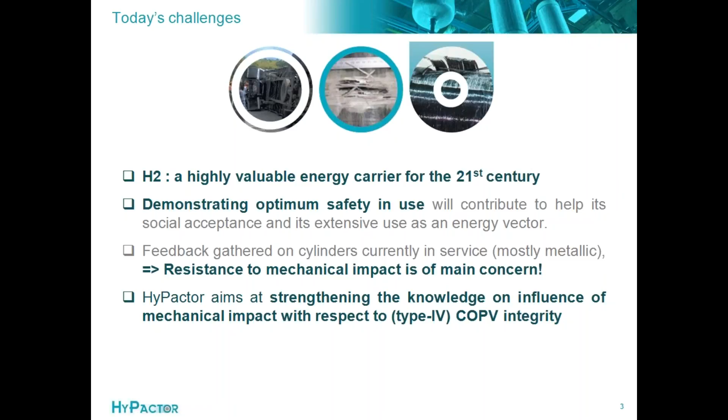These are a few pictures of what we think of as real-life examples: truck rollover or fall down, cylinders hit while mounted on the roof of buses or trucks that go through bridges where they shouldn't have gone, road incidents, rollovers which could also be coupled with fire issues, or even attacks from aggressive people.

The consortium is composed of 7 different partners, 4 from France: CEA is coordinating, along with Air Liquide, Ayming, and Institut de Soudure. We also have a partner from Poland, the Wroclaw University of Technology, and 2 partners from Norway: the Norwegian Technical University from Trondheim, and Hexagon Composites with its third-party Hexagon Lincoln in the US.

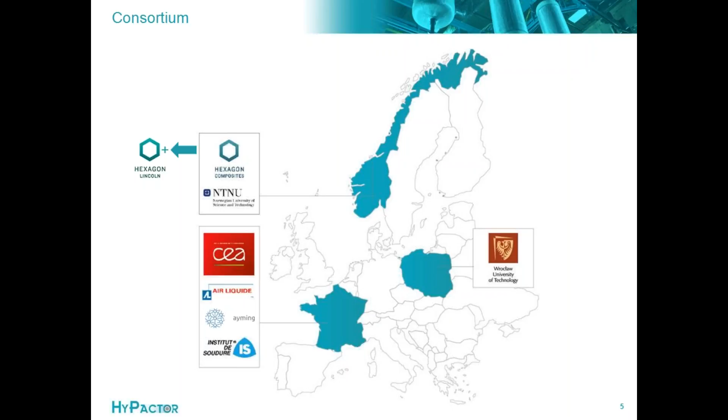A brief overview of the competencies or contribution of each partner: composite pressure vessel testing is mainly CEA and WRUT; companies operating CPV are Air Liquide and Hexagon; tank supplier is Hexagon — in this project we only test cylinders manufactured by Hexagon on a serial production line. We have partners for non-destructive testing development, which are Institut de Soudure, WRUT, and CEA; modeling is done by the Norwegian university; regulation code and standard development involves Hexagon, Air Liquide, Institut de Soudure, and CEA; and project coordination support to the coordinator is Ayming.

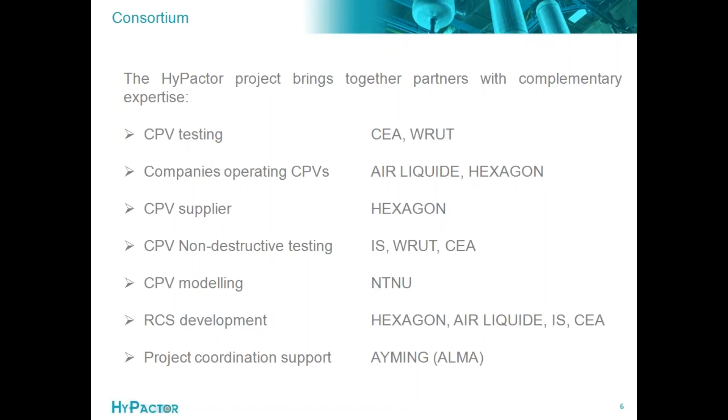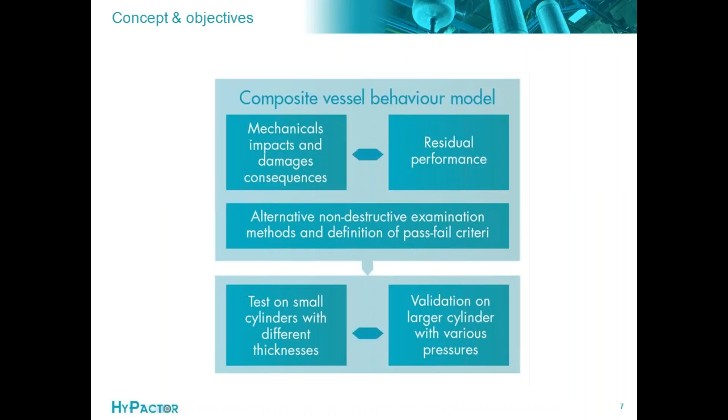About the organization and concept of the project: we start from experimental work on mechanical impact and damage. When tanks are subjected to impact damage, we assess their residual performance, both short-term and long-term. In parallel, we perform non-destructive examination methods to characterize the damage and contribute to defining pass-fail criteria for regulation code standards. We do most testing on a reference cylinder, a 36-liter cylinder with service pressure at 70 megapascal (700 bar), but we also include validation on some larger cylinders with various service pressures.

Regarding the work package organization: work package 1 is coordination, with 3 big technical work packages. Work package 2 covers the study of damage due to impact. Work package 3 covers the assessment of residual performance of these impacted tanks. In parallel, there are inspection method developments, and finally a work package dedicated to dissemination and recommendations toward normative committees.

About the goals, one of the first big goals of the project is to aggregate an extensive experimental database which links the impacts, characteristics, and the damage to the tanks and the residual performance. Then, of course, we want to achieve a deep understanding of the relationship between impact, damage, and loss of performance of the cylinders. We want to be able to develop some modeling to simulate or extrapolate the mechanical impact on CPV and their residual performance.

Then we want to assess and develop relevant non-destructive testing for inspection procedures. And of course, as it is a pre-normative research project, we aim at being able to provide recommendations for the committees. Our main concern is focused on qualification requirements and acceptance criteria for new designs. But we also want to propose some enhanced impact test configurations or procedures for periodic inspection. That is all of our purpose for this research project.

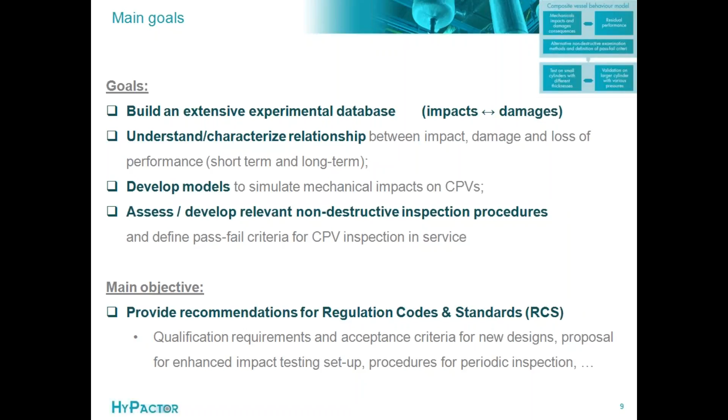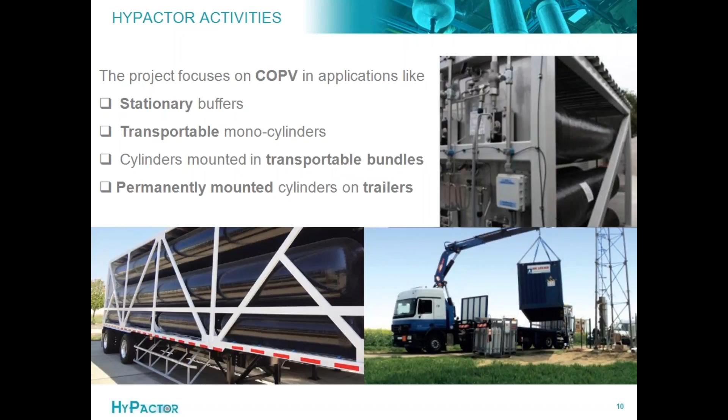A few words about the applications that we're targeting in the project. We assess stationary buffers, transportable monocylinders, cylinders mounted in transportable bundles, or even permanently mounted cylinders on trailers.

A few words about the testing activities, just to provide you a first overview, and you will have a detailed presentation in the next talk. An average figure about the tanks that were tested in the project: an average number of 100 different tanks tested, from service pressure of 250 bar up to 950 bar, water volumes from 36 liters up to more than 500 liters.

We tested different impact energy from low energy up to 10 kilojoules. Impact weight from 1 up to 100 kilograms, speeds from 3 to 120 meters per second. Multiple impacts, various pressures of the cylinder submitted to impacts up to the maximum allowable service pressure. Test to failure or test impact just for characterization. And we have assessed the residual performance, talking about short-term but also long-term evaluation.

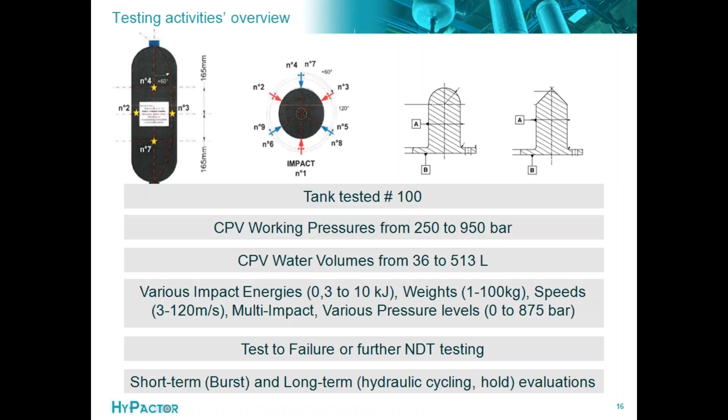Okay, that's all for the introduction. I will now give the computer to Olivier. We will directly move for a more comprehensive introduction of the project, to work package 4 to talk about the inspection methods. Thank you, Fabien. Olivier Bardou from Air Liquide. Let's talk about inspection methods, work package 4.

What are the objectives of work package 4? First, to define the non-destructive technique protocols to be used in the other work packages to assess and characterize damages. Second, to define pass-fail criteria for visual examination and acoustic emission tests. And then to give recommendations for inspection procedures suitable with operating constraints in operation.

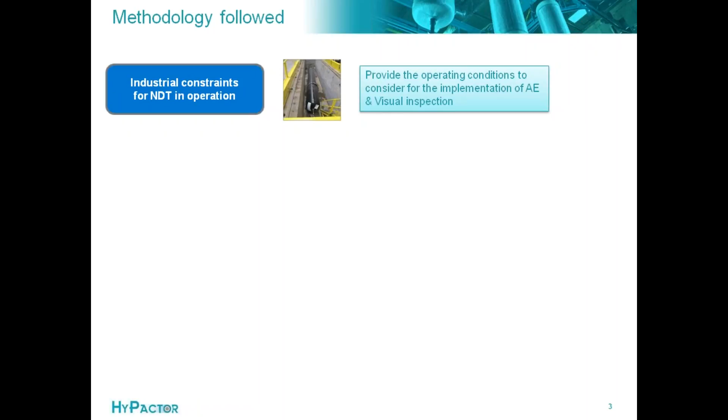What is the methodology followed? First, to have the industrial constraints for non-destructive testing in operation — that is to say, provide the operating conditions to consider for the implementation of acoustic emission and visual inspection. Secondly, to define characterization NDT protocols just to be able to identify the best non-destructive techniques to characterize the damages in terms of type, shape, location.

Third, to collect acoustic emission data. The goal is to provide a suitable acoustic emission procedure according to all partners' equipment, and then collect all acoustic emission data coming from the other work packages.

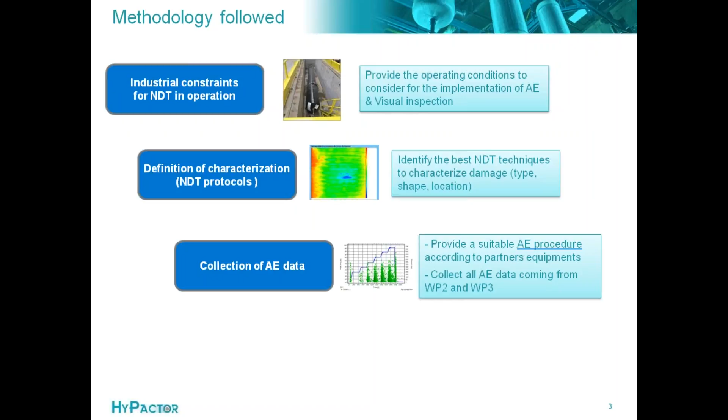And finally, to develop and validate pass-fail criteria by non-destructive testing. For this, we have to define the acoustic emission trial plan, and then define pass-fail criteria to be used in periodic inspection of composite overwrap pressure vessels.

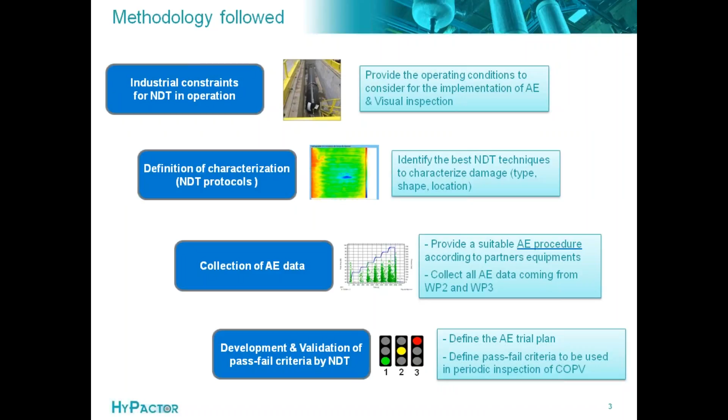Concerning industrial constraints for non-destructive testing in operation, two methods, acoustic emission and visual examination, are studied — they are the most mature at the beginning of the project. Two possible operating conditions were defined. First, in an existing filling center, we have a gas pressure source available at this location, and few perturbations of operation. The second possibility is in a dedicated acoustic emission workshop, where we have more perturbation of operation, but also more possibility to adapt a dedicated bench with acoustic emission procedure.

Definition of characterization with NDT protocols. A list of potential non-destructive techniques has been established with expected performance, and those techniques are dispatched among different partners. You can see the potential non-destructive techniques that we checked in this project: infrared thermography, shearography, deflectometry, 3D scanner, computed tomography, and ultrasonic technique.

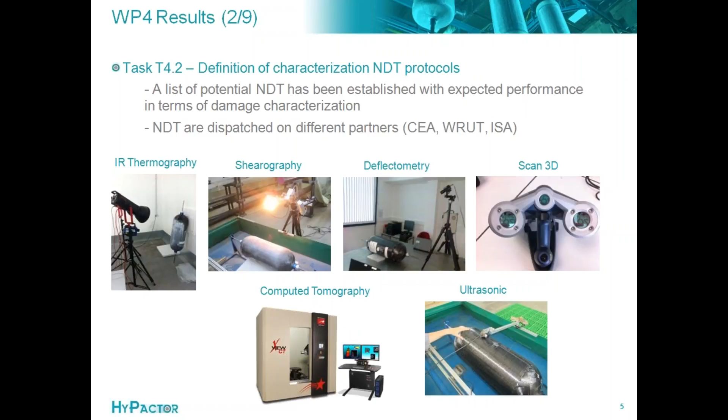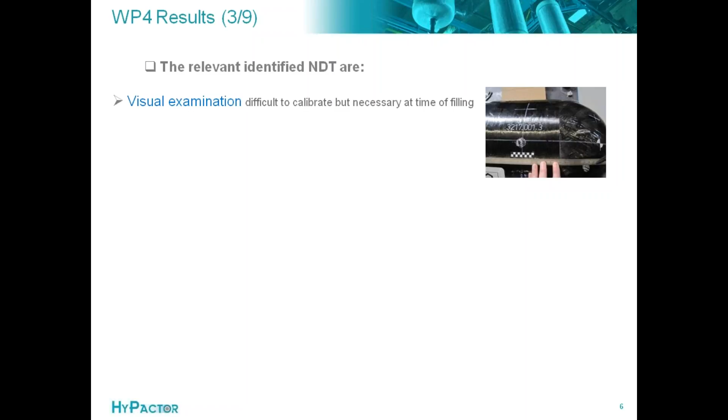The relevant identified techniques are, first, visual examination — it's difficult to calibrate, but it's necessary at the time of filling. Then ultrasonic testing and computed tomography scan are used when necessary, just to have good precision on damage assessment. And then acoustic emission, because it's a huge part of the project to define acoustic emission criteria.

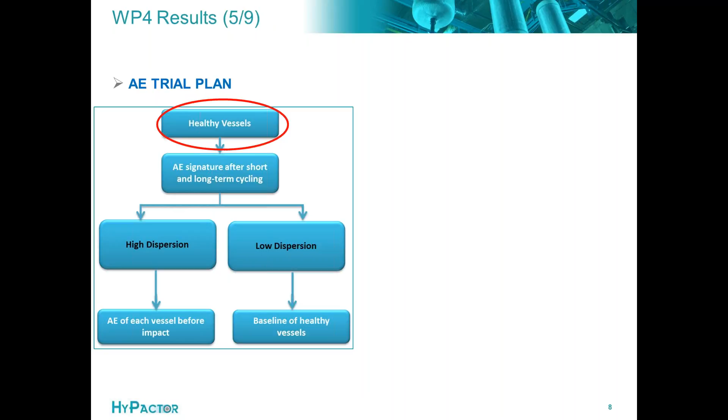For the second step, shown here in the right synoptic, acoustic emission tests are performed just after impact and also after different cycling periods until burst. With this approach, the challenge is to define pass-fail criteria enabling the identification of structural damage compromising the burst pressure strength. This identification must be possible whatever the periodicity of the control, and in particular regardless of the time between the occurrence of damage and the acoustic emission inspection. Here we have many cycling periods: 5, for example, 50 cycles, 5,000 cycles, and 15,000 cycles.

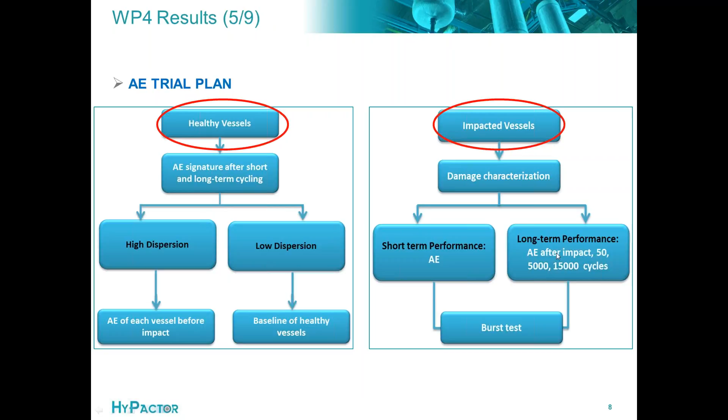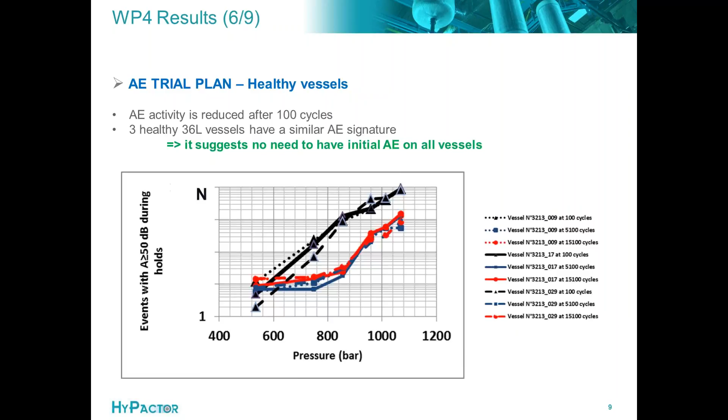So at this stage of the project, about 70% of the campaign test was already done, and the data analysis is in progress.

You can see here various volumes that have been studied. For example, we have the 36 liter, the 255 liter, and 513 liter vessels. These vessels have different features in terms of thickness, size, and service pressure. The number of sensors was defined in order to ensure a similar sensitivity of detection for all vessels. For example, for the 36 liter we used 8 sensors, for the 255 liter 20 sensors were used, and for the 513 liter we used 18 sensors.

So let's move now to the pass-fail criteria. These criteria must cover all these volumes, and to establish them, acoustic emission analysis will be based on Appendix 7 of the French guideline for acoustic emission, recently approved by the French government in 2014. It's the unique code which defines acoustic emission procedure for periodic inspection of composite cylinders.

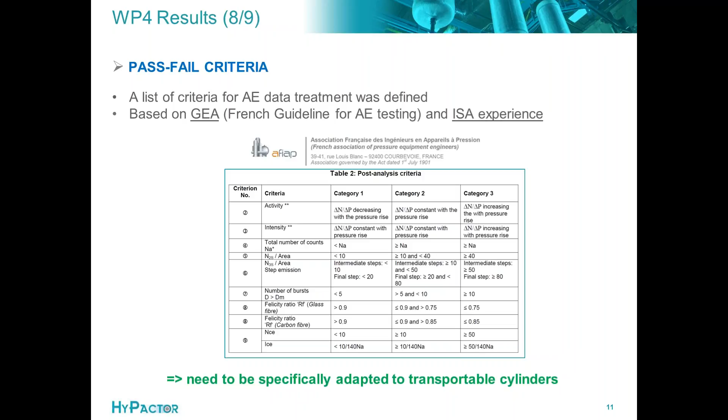And to finish, an additional NDT technique called modal acoustic emission has been involved recently by ISA into the scope of Hypactor. This method is used for periodic inspection and testing of COPVs, and is now under the ISO standard project, at the draft international standard stage.

We had in the Hypactor project the opportunity to check this method. That's why we undertook the necessary actions to involve this method in the scope of Hypactor, regarding the approval of all partners, the approval of the European Commission, and also all investments needed to explore this method.

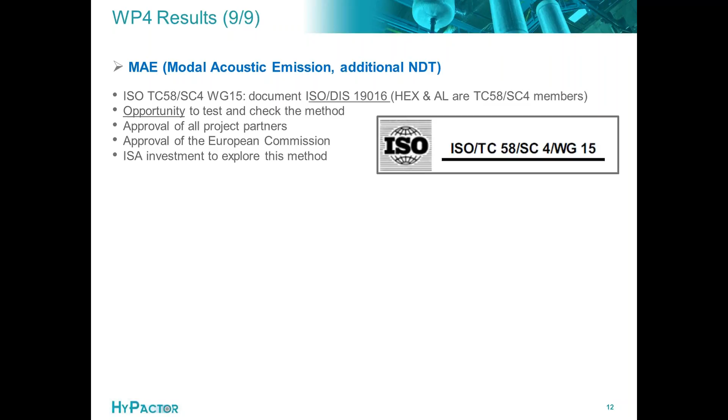At this stage of the project, many vessels have been controlled by this method, and calculation of criteria according to the ISO standard is in progress with the collaboration of the Digital Wave Corporation from USA. Due to the lack of experience in Europe on this topic, results from the Hypactor project will be used by Work Group 15 to feed the understanding of modal acoustic emission on composite cylinders, and I think it may have a direct impact on the ISO document.

So thank you for your attention. I will give the hand to Olivier to conclude.

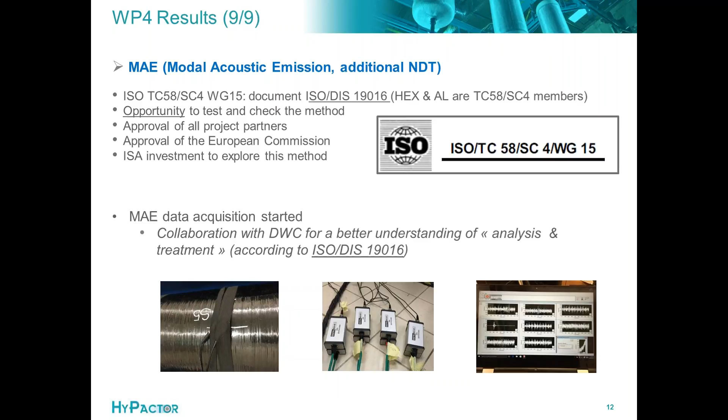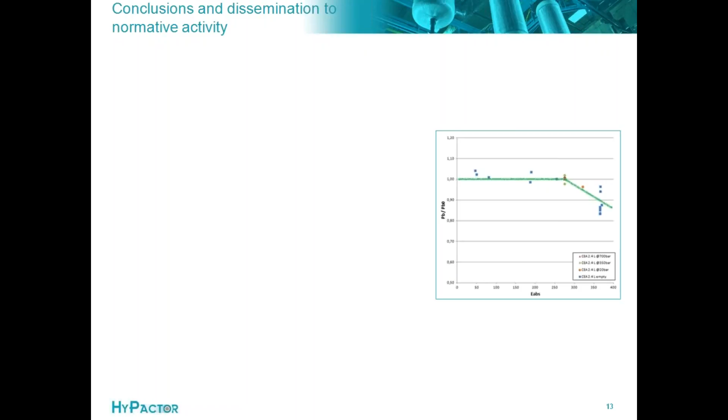Thank you, Feti. So this is the last slide for Work Package 4. Just to conclude and to speak about dissemination to normative activity: first, concerning the pass-fail criteria to be defined for critical damage, what is difficult is that we need accurate knowledge on critical damage, which we will speak about especially in Work Package 3. And this critical damage may be sensitive to cylinder type.

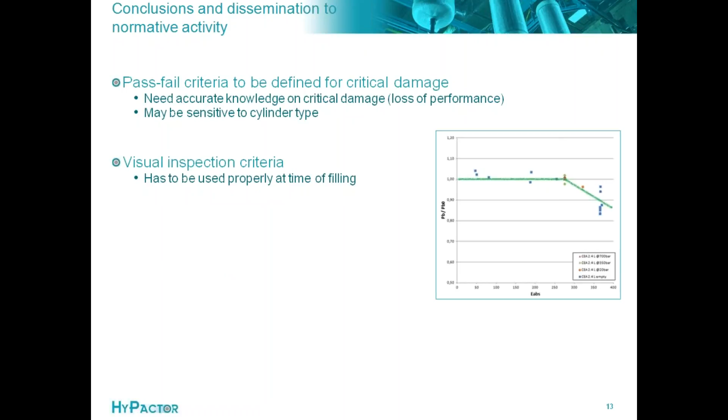Concerning visual inspection criteria, it has to be used properly at time of filling. Classical acoustic emission criteria are under construction, as Feti said. Concerning modal acoustic emission, the tests are in progress and analysis is also in progress. What is sure is that this is a way to check the draft international standard 19016 and to try to give support to Working Group 15 at Technical Committee 58, and then to explore this new method properly. Thank you for your attention.

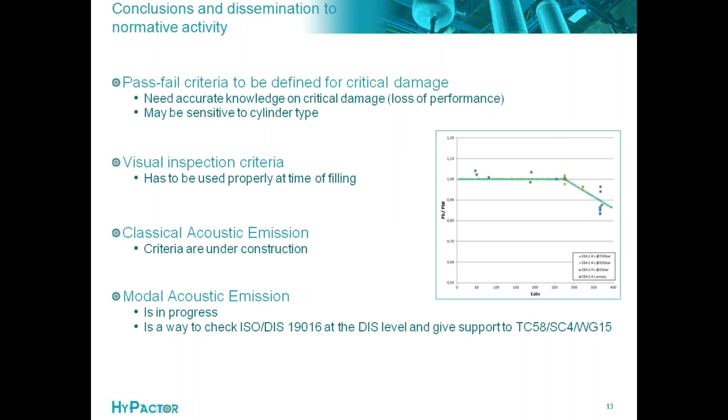Hello everyone, my name is Noémie Alexandre from the CEA, and at the end of the presentation, or rather the middle of the presentation, this presentation will be made by Sylvie Bitton-Giebel from Institut-JU. So we are going to have an overlook at Work Package 2, whose title is Study of Damages Due to Impact.

First of all, the objectives of Work Package 2 number 6 different objectives. First of all, the idea was to compile a synthesis document on historical incidents and accidents on vessels by impact, based on public data and industrial operational experience.

Then we wanted to carry out experimental campaigns of impact on vessels to determine damage characteristics induced by impact in terms of type, volume, and so on, to identify correlation between impact parameters and induced damage, to identify the impact conditions that produce immediate failure, and at last, to select the most relevant impact conditions from the impact matrix to be further tested in Work Package 3, where we study the residual performance of the impacted tanks.

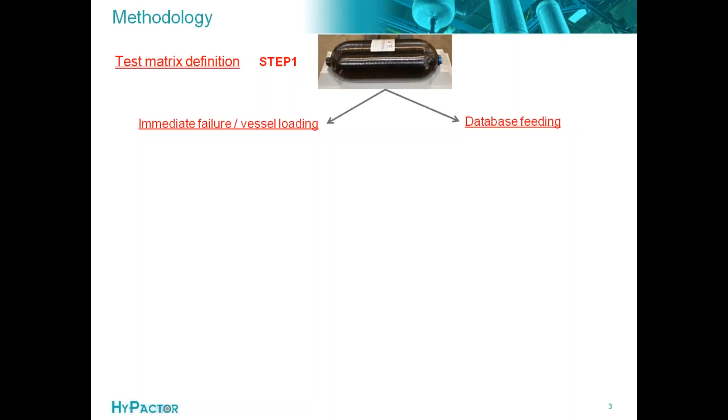The first part was dedicated to immediate failure of the vessel just after an impact, and the second part was made in order to feed a database with a great number of damages characterized.

In order to determine the immediate failure of a vessel during an impact, we had several tests with several vessel loading: 20 bars, 700 bars, 875 bars, and empty vessel also. We had only one kind of projectile, hemispherical, diameter 56 millimeter with a weight of 1.2 kilograms, and we increased the energy of the impact from 1 kilojoule to the failure. I will show some results afterwards.

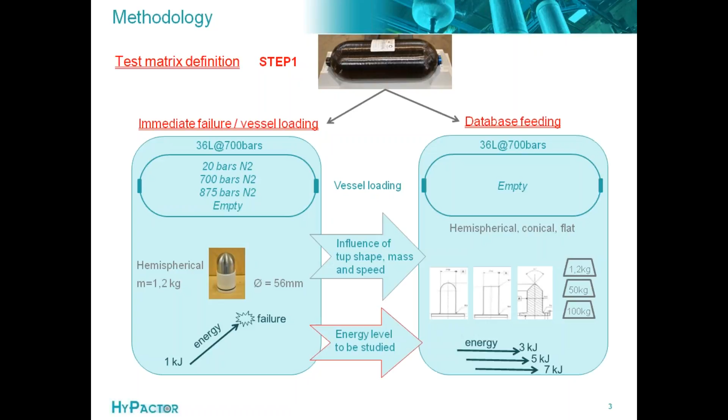Thanks to the results of this first part, we could define the different energy levels that were interesting to study: 3 kilojoules, 5 kilojoules, and 7 kilojoules. And for each energy level, we used several projectiles with several weights and several shapes.

All these impacts have been performed on empty vessels. So we had hemispherical projectile, conical, and flat, and all these with different mass: 1.2 kilograms, 50 kilograms, and 100 kilograms. In that way, we created a large database with many different damages that could be characterized using NDT.

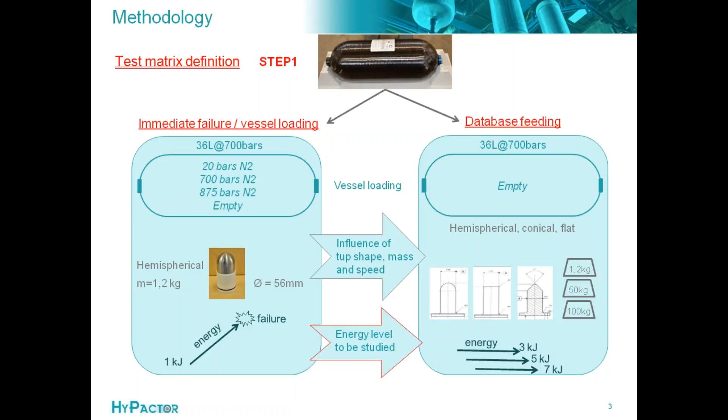The second step of this test matrix was done on 2 different impact conditions, and then we studied the influence of other parameters. Those parameters were impact parameters related to impactor shape. We had already started this study, but we wanted to go further.

And repeated impact. I mean, instead of one impact of 3 kilojoules, we made 3 impacts of 1 kilojoule at the same point in order to see if the damage was different or not. That was for impact parameters.

On the other hand, we studied the influence of vessel characteristics. The first parameter was the composite thickness. We had a dedicated specific vessel with nominal thickness increased by 20% and by 40% on the standard 36 liter, and we also impacted a large vessel, 250 liters.

Then we studied the influence of the impact localization with impact in the dome area, which will be, of course, different. All the other impacts are performed in the middle of the vessel when there is only one impact per vessel, and at different points on the cylindrical part when there are several impacts on the same vessel.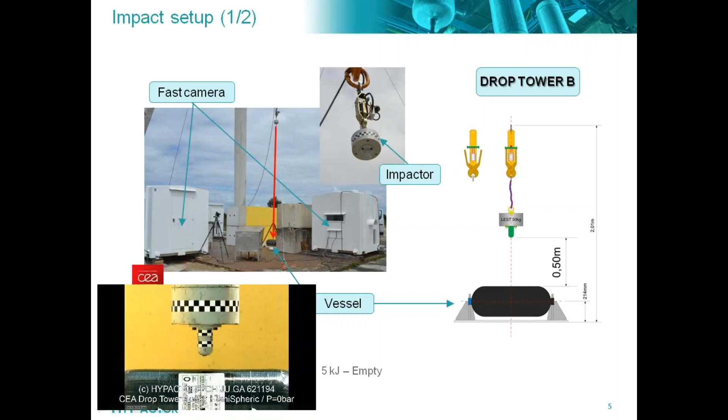The second one is with a pneumatic cannon, and you can see on the video an impact of 5 kilojoules on a vessel of 700 bars, and you can see the pneumatic cannon and the protection all over, and the projectile is just here.

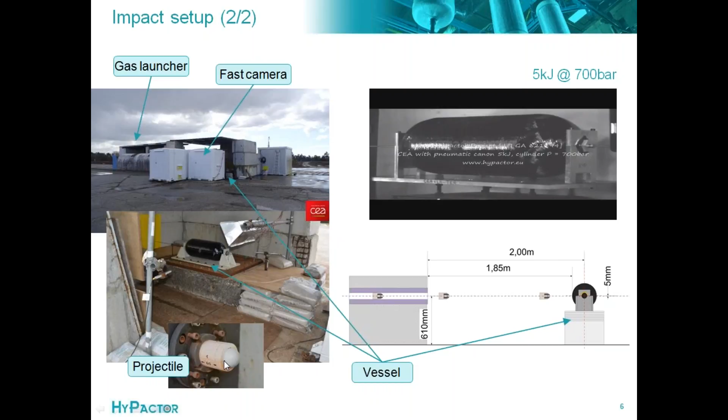So what have we done? What are the first results we can obtain with this? As I said before, the objective is to get the threshold of the immediate failure. We couldn't imagine spending one vessel for one impact just for this study, so on the vessels there are several impacts. One line is one vessel, so we have different pressure, 20 bars with nitrogen, 1, 5, 10 kilojoules. Then 700 bars, 1, 5 kilojoule, and so on. So we have studied different levels of pressure with nitrogen and different levels of impact energy.

We observed several phenomena. With 20 bars, 1, 5, 10 kilojoules, then the projectile was embedded. With 700 bars and 1, 5 kilojoules, the picture is here, we had leakage. Then we tried again with another vessel, and we managed to do 2, 4, 5, 6, 7 kilojoules, but we had a pneumatic burst at the end.

At 20 bars, we managed to do all the impacts from 1 to 6-8 kilojoules, twice. Of course, the damage is visible. We can't miss it during visual inspection.

With the empty vessel, we went from 1 to 9 kilojoules by steps of 1 kilojoule. You can see here a very light, hardly visible damage due to 1 kilojoule.

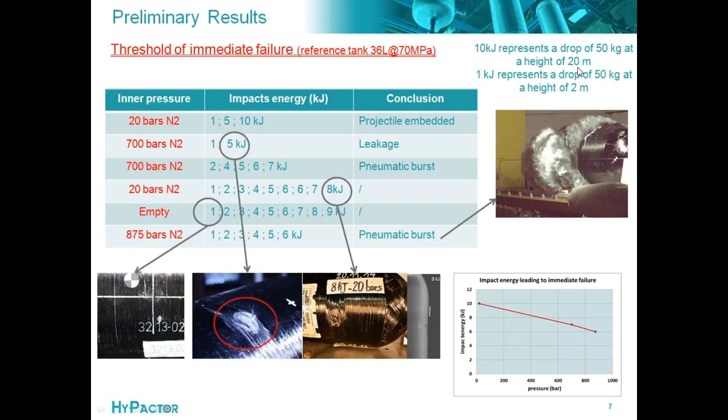Just to give you an order of magnitude, 1 kilojoule represents a drop of 50 kilograms at a height of 2 meters, which is more or less reasonable, but 10 kilojoules is the same mass, 50 kilograms, but at a height of 20 meters, which is quite important.

The second kind of preliminary results we got is the influence of the impact conditions on penetration depth. Penetration depth is the depth of the projectile through, let's say, more or less, the composite part.

All these impacts are done at the same energy, 3 kilojoules, with the same shape of projectile, and we want to study the influence of the mass and the shape.

Sylvie will show the damage inside the composite, but here we can study the damage on the outer surface of the composite. What we notice is that if the energy is constant, we do not have any influence of the projectile mass on the penetration depth.

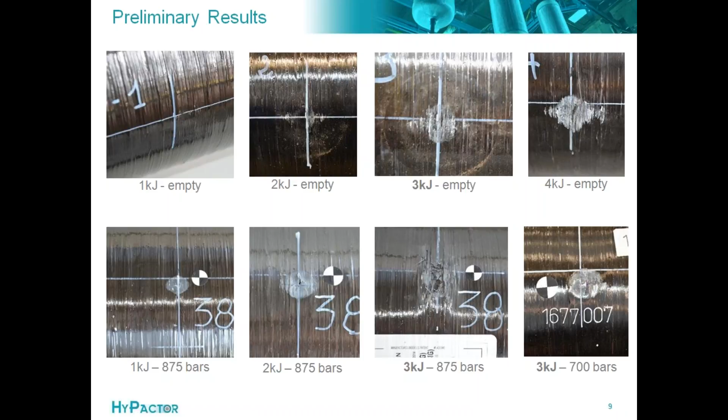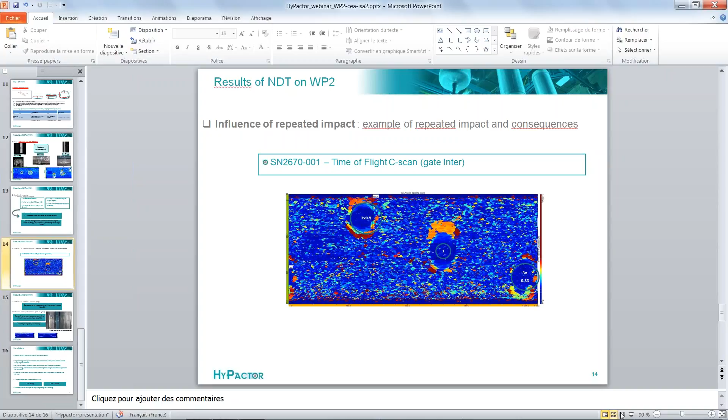Sylvie, we can't hear you yet. Do you hear me? Yes, it's good. And we see your screen.

So I am Sylvie Bittenibel from Institut de Soudure, and I will speak to you about non-destructive testing we've done on this composite pressure vessel.

The objective of this testing was to determine the damage characteristics in terms of type, shape, and size. So for each impact location, we have done some visual inspection, as Noémie showed you just before. We have done internal and external visual inspection.

We have also done ultrasonic testing and, if necessary, some tomography. So on this screen, you can see the results coming from one impact - for example, impact number 5 on this specific vessel.

This vessel was used for the study of impact penetrator shape influence.

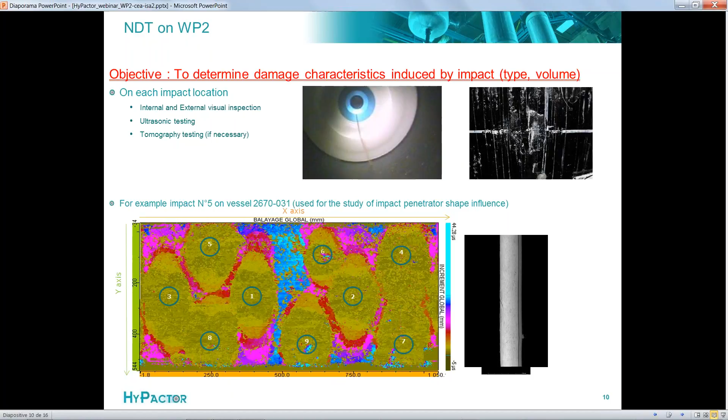We define with the other partner the definition of the damage. We define different types of damage: fiber failure, matrix failure, delamination, and liner deformation. For each of them, we define a way to characterize them by length, depth, surface, or volume. And for each of them and for each technique, we built an Excel file with all the characteristics of all the damage induced by impact.

I will show you some results of 3 different energies. You can see on this screen for the 36 liter vessel we studied the results of damage created by the 5 kilojoule energy with 700 bar inside, the 1 kilojoule energy empty, and here are the results you saw just before with the last example for the 3 kilojoule energy empty.

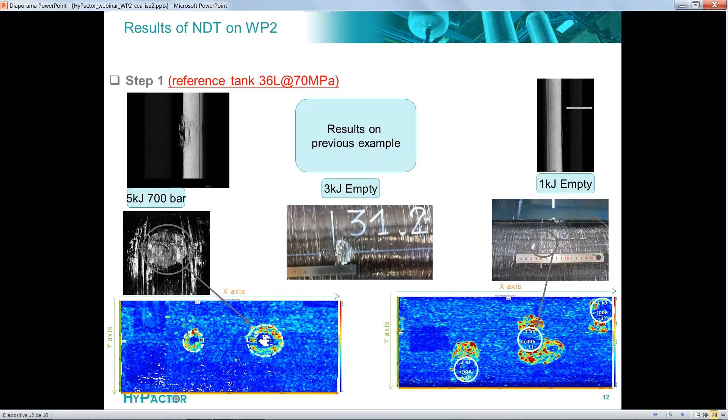In step 2, we studied, as Noemi said before, several parameters for the impact. I chose to show you some results coming from the study of repeated impact. We wanted to know if there was a difference in the damage created by only one impact, for example one impact of 3 kilojoules, compared to 3 times impact of 1 kilojoule. We did the same with 1 time 1 kilojoule compared to 2 times 0.5 kilojoule or 3 times 0.3 kilojoule.

I will show you on the next slide the ultrasonic testing results, but the main result is that repeated impact contributes to the induced damage, but the induced damage seems to be more related to impact condition, for example vessel empty versus vessel at 700 bar, than to energy.

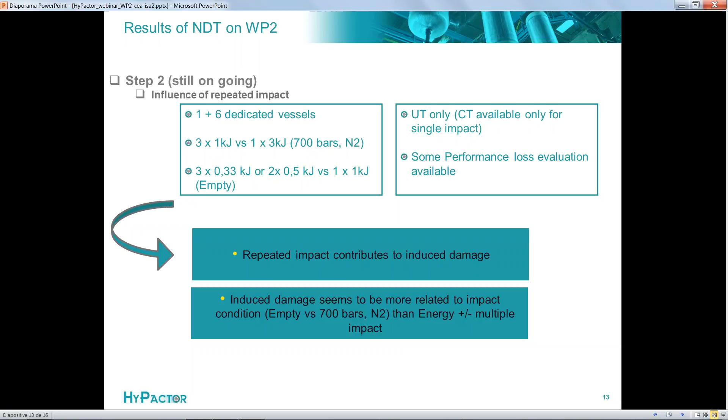These are the ultrasonic results for this study, where you have on this vessel 3 impact locations with 3 different energy impact repartitions.

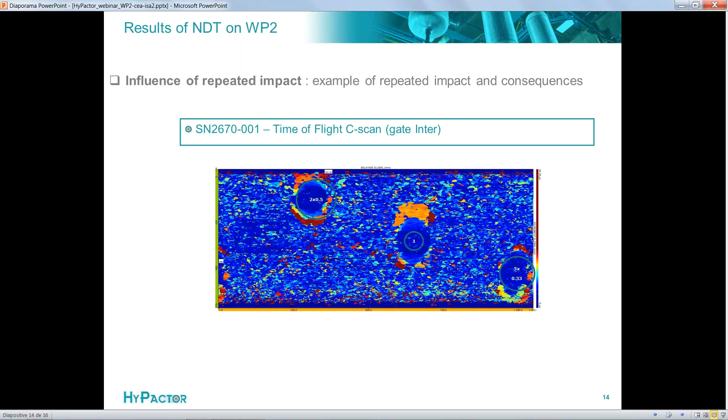We also studied in this work package the influence of the change of thickness. For now we don't have all the results, but so far we have the same behavior on the induced damage when the thickness is changed.

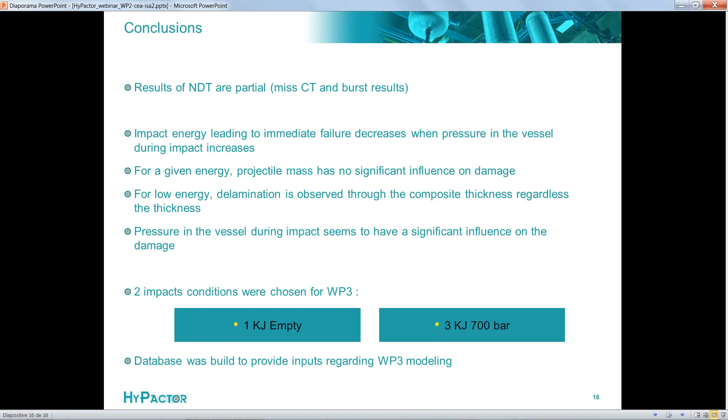I will talk about the outcomes of an still ongoing work package 3, which is concerned with residual performance assessment of impacted tanks. I will present here tasks 3.1 and 3.2. After me, task 3.3 will be presented by Kasper Lassen from NTNU.

There are four main objectives of work package 3. The first objective is to quantify residual burst resistance of impacted tanks, to determine failure mode, and to compare it with the burst resistance of healthy tanks. This will be achieved by gradually pressurizing the vessel to monitor damage evolution with acoustic emission. The final assessment will be the residual burst pressure of a vessel.

The second objective of the task is to assess long-term influence of impact on tank performance. This will be achieved by exposing the vessels to fatigue load, more precisely to pressure cycling. And this fatigue load will be interspersed with acoustic emission monitoring of the evolution of damage.

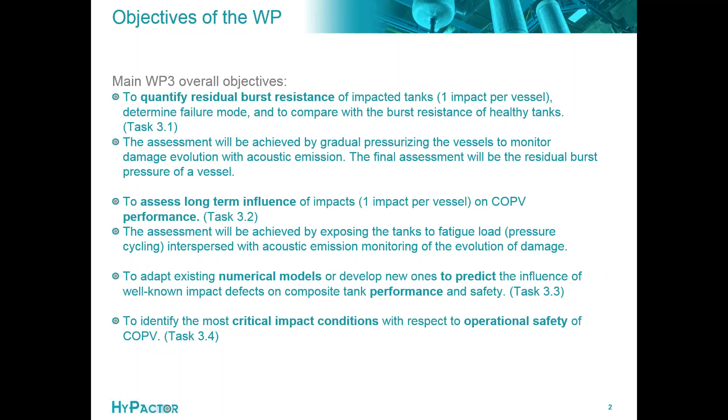The third objective is to adapt existing numerical models or develop new ones to predict the influence of well-known impact defects on composite tank performance and on their safety. And the final objective is to identify the most critical impact conditions with respect to operational safety of composite pressure vessels.

To assess the short-term residual performance, the impacted vessels first go for NDT characterization to assess the initial state of damage. The NDT is mostly visual inspection and ultrasonic testing. After the inspection, the vessel is pressurized while monitoring the acoustic emission, following which the vessel is once again pressurized, this time until burst is achieved.

To assess the long-term residual performance, initial steps are the same as for short-term assessment: impact followed by NDT characterization. Then the vessel undergoes the long-term performance test campaign. Finally, the residual performance after the campaign may be found by burst test. Alternatively, we may perform computed tomography upon the vessel to see if the damage evolved during cycling.

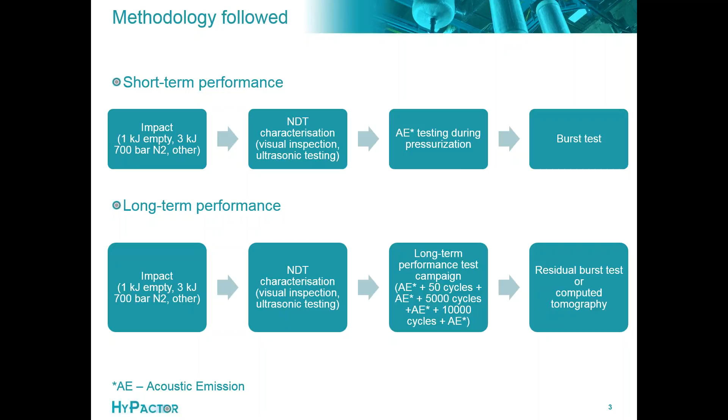Acoustic emission is performed on 36-liter vessels using 8 acoustic emission sensors. 6 of them are placed on the cylindrical section of the vessel, and 1 sensor is placed on each dome, as you may see in the picture I show you. Larger vessels require more sensors, up to 20 sensors in the case of 255-liter vessels.

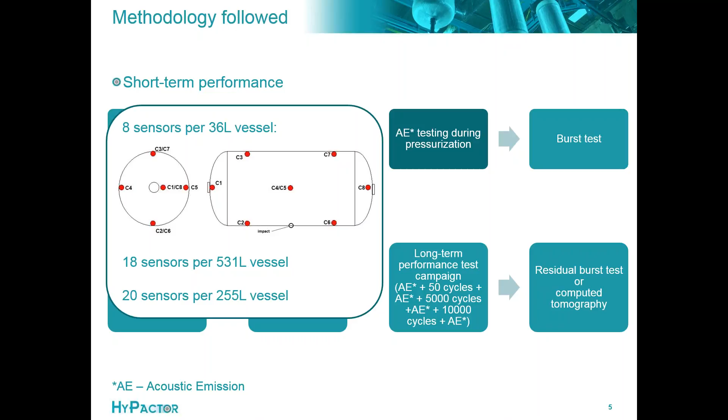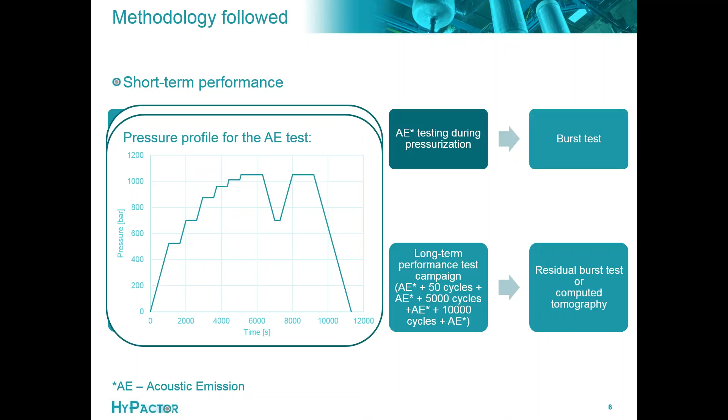For the acoustic emission test, the vessel is pressurized according to a distinct pressure profile, as you may see in the picture. The maximum pressure for 36-liter vessels is 1050 bars. This pressure is equal to the test pressure of this tank design. This pressure is reached through several increments with 5 to 20-minute holds at each increment. The acoustic emission is gathered both during holds and when the pressure is increased or decreased.

In a long-term testing campaign, the cycling is interspersed with acoustic emission tests according to the profile I have just shown you. Acoustic emission test is performed after the impact and then after each cycling step. There are 3 cycling steps: 50 cycles, 5,000 cycles, and another 10,000 cycles. In each cycle, the pressure is increased from 20 to 875 bars and back to 20 bars. The cycling rate does not exceed 10 cycles per minute. The total number of 15,000 cycles was chosen so that it reflects 3 times the number of cycles in the predicted lifetime of the vessels.

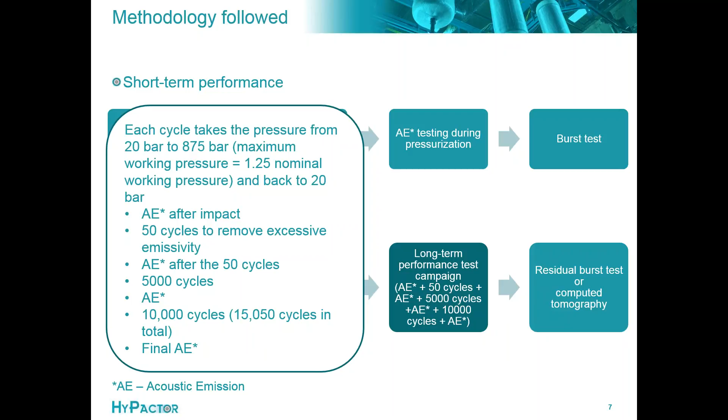Here you may see the burst pressure of the vessels together with impact points on vessel surface. Please note that the surface damage is barely visible, especially in the case of 1 kilojoule impact.

In line with the acoustic emission results, we do not see any drop in burst pressure of impacted 36-liter tanks compared to healthy ones. Please recognize that the confidence intervals overlap, and in all cases the burst pressure is higher than the minimum burst pressure, which for this design is 1575 bars. This means that the short-term performance of the vessel was not significantly influenced by these energies of impact.

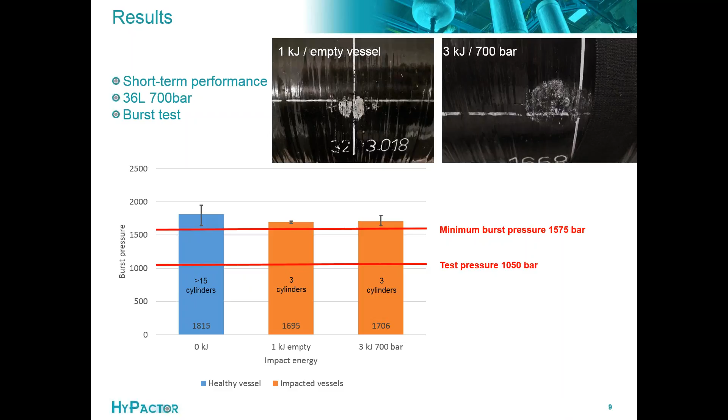Still greater energies would be needed to compromise the performance of the vessel, which I show you in the next slide. Here you may see burst pressure for vessels impacted once with given energy up to more than 9 kilojoules. The vessels are impacted either empty or pressurized to 700 bars.

It is obvious that sufficiently energetic impact does indeed decrease the burst pressure of a vessel. It may be seen that the pressurized vessel loses performance at higher impact energies than empty vessels. Pressurized vessels are stiffer and therefore seem to alleviate the severity of damage.

The line for pressurized vessel is currently based on just 2 points, but we plan to improve this with more impact points to put more points on the graph. You may also note that there is a distinct plateau for pressurized vessel where impacts up to 3 kilojoules do not seem to lead to reduction of burst pressure. A similar thing may be also true for vessels impacted while empty, only in that case the threshold of performance reduction would lie around 1 kilojoule.

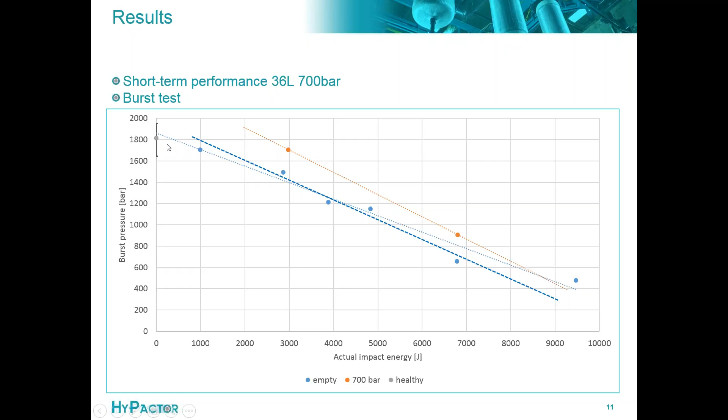For the long-term performance, the vessels are still undergoing the long-term performance campaign, so we do not have definite results yet. However, we may compare the evolution of acoustic signature for healthy vessels and vessels impacted with 1 kilojoule up to 5,000 cycles. One thing to note is that the vessels are quieter after a large number of cycles than when they are relatively new.

That said, there is not much sign of damage evolution in impacted tanks, indicating that they would be safe for use.

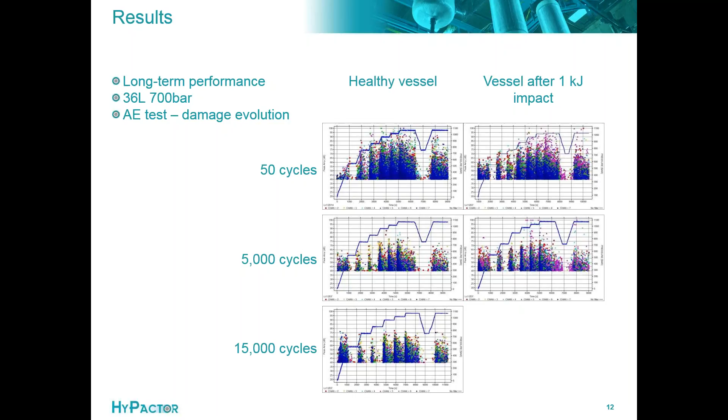To conclude the results of these 2 tasks concerned with residual performance of impacted vessels, it has to be stressed that the short-term performance of 36-liter vessels does not seem to be significantly impaired after 1 kilojoule and 3 kilojoule impacts. The threshold for the loss of short-term performance lies at higher energies.

Also, no loss of performance in the long term is expected either after such impacts, at least up to the vessel's predicted lifetime. It is worth noting that according to current standards, impacts are performed at energies lower than those in our tests. It might be therefore worthwhile to consider if the impact conditions should not perhaps be correlated to the working pressure and volume, or in other words, to the wall thickness of the vessel.

All these results we have gathered here will be fed into the numerical model, which will now be described by my colleague Kaspar Lasn from NTNU, which I now give voice to.

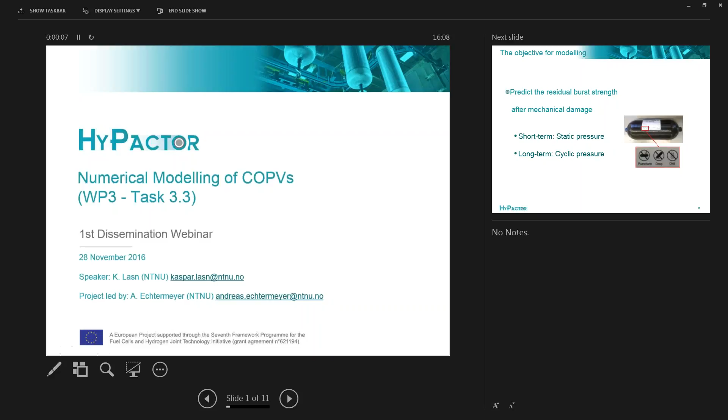Kaspar, we can't hear you. Do you hear me now? Yes, thanks. Okay, I will try to show my screen. Is it working? Yes, it works. All right.

Thank you, Michael. Good afternoon. My name is Kaspar Lasn, and I'm calling you from NTNU, Norway, to briefly summarize our work on numerical modeling of composite overwrapped pressure vessels and a little bit of experimental work connected to it.

The objective of the modeling is to predict the residual burst strength after mechanical damage, including both the short-term residual burst pressure under quasi-static conditions and the long-term residual lifetime under cyclic pressure.

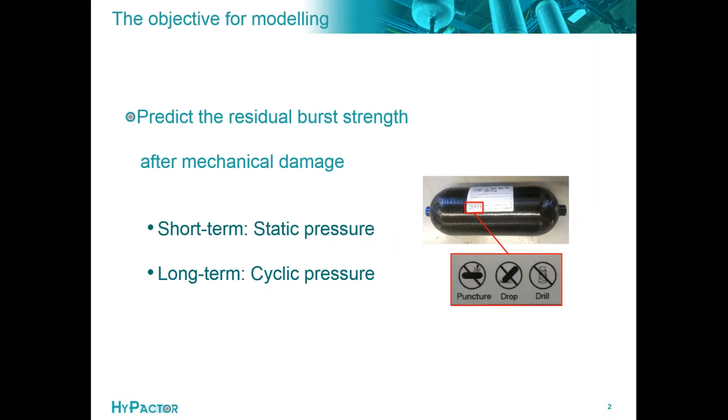Before going to the numerical models, a few words about the context regarding the damage. As you all know, the damage is typically modeled as a consequence of a physical event, which includes parameters such as impact energy, shape of the impactor, boundary conditions, etc. However, if a cylinder is inspected, for example, in a filling station, this knowledge will not be available. Only the information which can be collected with non-destructive test methods will be available.

So all in all, our models can do both. They can model the creation of the damage from a physical event, but also we have a possibility to implement damage from non-destructive tests. So this last point actually points to the importance of the quality and the resolution of the NDT methods. For example, on the right we see an impact detection or location detection from a grid of inwound optical fibers.

And also what is important is information transfer from non-destructive testing to the numerical models. To facilitate this, we have developed what we can call a code of how we share this information between the partners. Essentially, it consists of simplified damage geometries for different failure mechanisms, and this was also shown previously by Sylvie in work package 2.

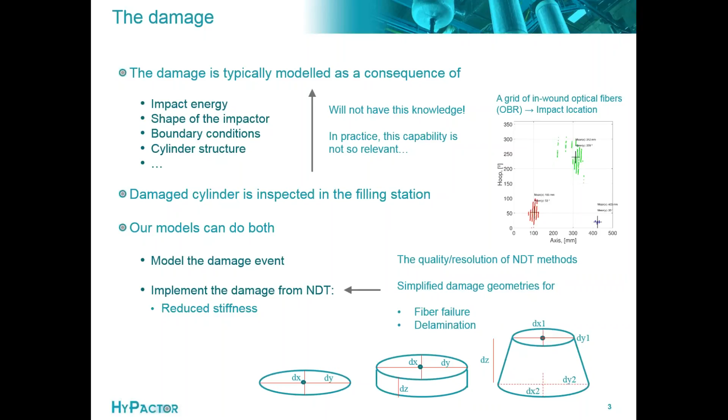So to address the two objectives, two models have been implemented. First, the short-term burst model, where the impact damage can be incorporated. It can show the damage development and predict the residual burst pressure.

However, proper input of material parameters is critical, just as critical as the model itself, or for that matter, proper input of damage sizes and types.

In addition, a fatigue model has been implemented also in three-dimensional finite element analysis. The fatigue life there is calculated for failure mechanisms in each of the elements. Two failure mechanisms, fiber tensile failure and delamination, are considered. The failure is predicted, and thereafter elastic property is reduced, which results in stress redistribution.

So this describes the one loop. The model was first developed for simple geometries, and currently the implementation to cylindrical shapes is in progress.

So a little bit more detail about our short-term model. The short-term analysis is conducted by a 3D parametric model, which has been implemented in Abaqus Explicit. On the right, we see an overview of the components, and the model includes the following options.

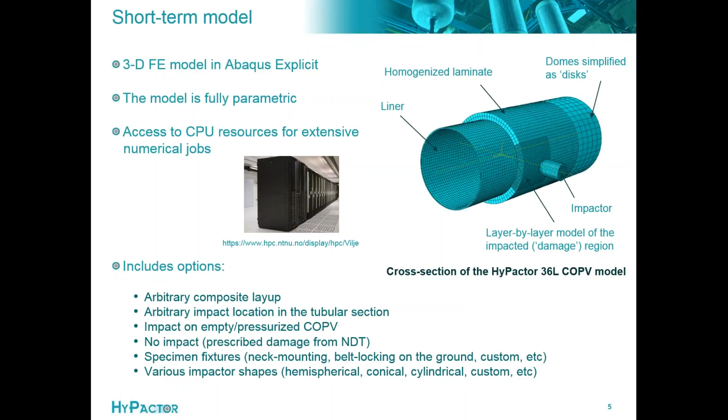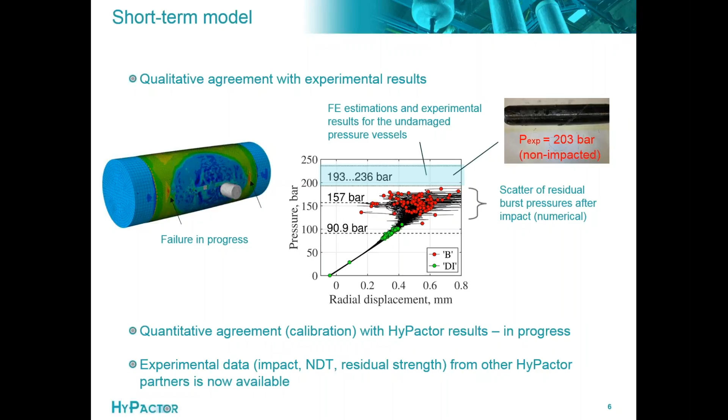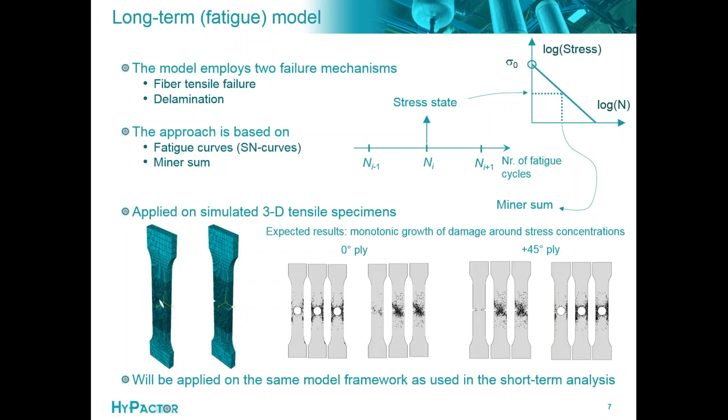The principle of the one analysis loop is shown to the right of the screen. This fatigue modeling approach has been implemented on tensile specimens with central hole or symmetrical notches, where the results have displayed expected results of monotonic growth of damage surrounding the areas where we have stress concentrations. The fatigue modeling approach will be applied on the same geometrical framework as is used in the short-term model.

With modeling, there always comes a question about input parameters. The typical test methods for materials are defined for flat panels, whereas cylinders are produced by filament winding, and therefore it is assumed that this material has different properties than flat panels.

The critical parameters for our modeling were identified as fiber tensile strength and toughness, and also interlaminar shear. And we have developed a few test methods, including our own small-scale pressure vessels, to characterize short-term and long-term response.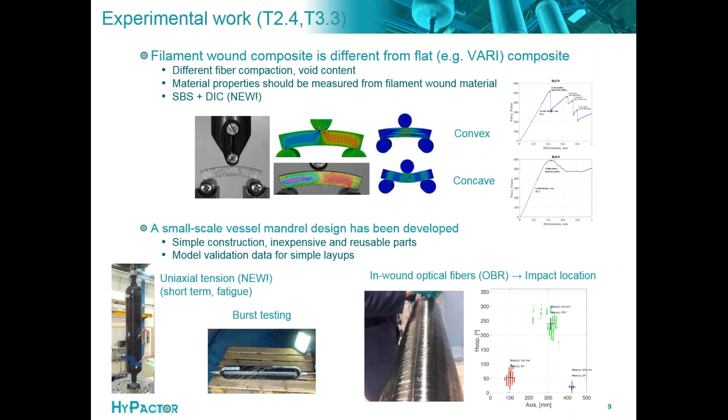We have created a short-term analysis model and a fatigue analysis model using three-dimensional finite element analysis, and the work on the latter one is still ongoing.

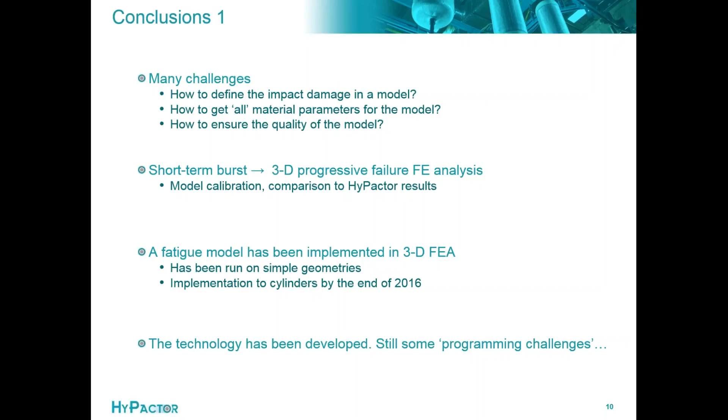All in all, the technology has been developed, however there are still a few programming challenges. And last but not least, most interesting parts are ahead, that is the comparison to HyPactor experiments, as the data from other work packages regarding the residual performance and non-destructive testing is now available. And also the experiments have pinpointed a few of the phenomena which need to be reasoned and investigated by modeling.

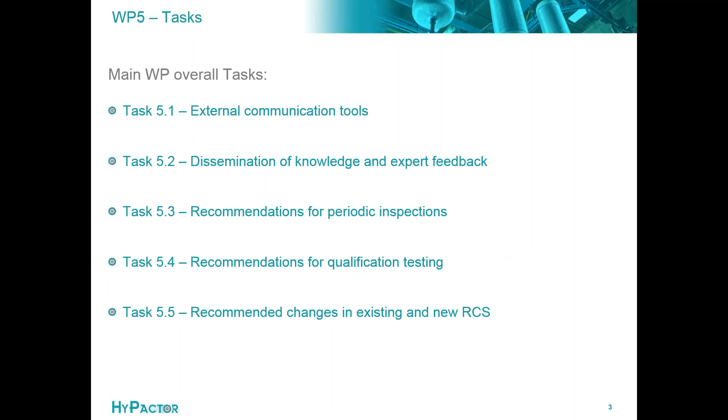One or the other of you may have already visited the Hypactor webpage. This is the key and most important external communication tool for us. Here you can find further information about the project participants and structures, but also the results will be published on this webpage. You can find already some public deliverables, with more to come within the next 3 to maybe 6 months.

If we have interesting publications from the participants, we will share and link this onto the webpage. Like you can see here on the screen, it's a publication from Kaspar, who just presented the simulation part of the project about the sensitivity of the burst performance of composite pressure vessels to material strength properties. That's already a result coming out of the Hypactor project, available on this web page.

Here you will also find in the future new results and new information about what's going on towards the end of the project.

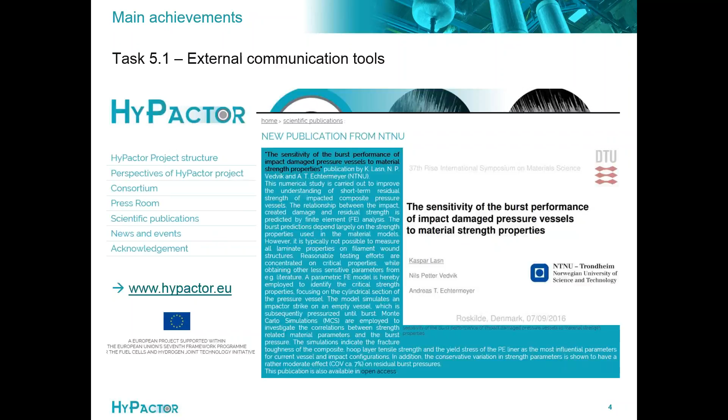Dissemination of knowledge and expert feedback was and will be done through international publications and presentations at conferences, as well as journal publications. We have created an action plan to disseminate the results, discussing internally where and how we can disseminate them, mainly concentrated on NDT methodologies, cylinder qualification, and periodic inspections.

For that we created an expert networking group, and all of you now listening to the webinar are part of this group. We want to have exchange and advice for our ongoing work, and basically start the exchange of information with you on this topic.

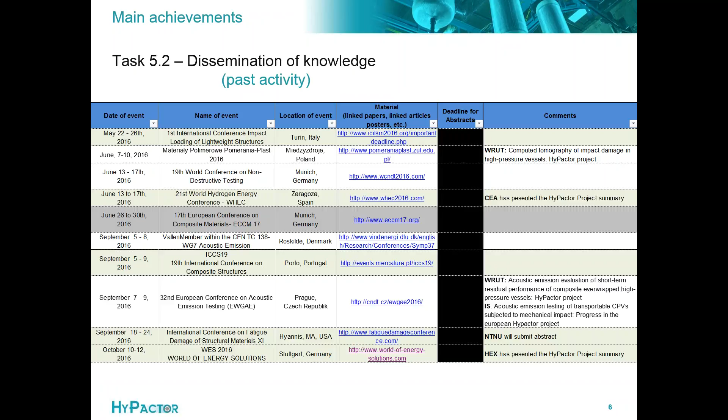We have already participated in several events and conferences over the past years, spread around Europe from Germany to Poland to Spain, and this will continue within the next year, probably until mid of next year, where we will participate in several seminars and conferences.

One important activity will be the final Hypactor workshop, in the second quarter of 2017. The location is still TBD, but you will get information as soon as available about the location and date of the workshop.

You can follow the updates on the website to get the latest news on this event, where we expect to have all the recommendations and results gathered in the final workshop. The plan is also to update and bring this table to the web page, so you can meet us at the different conferences where you want to participate.

The next task is regarding periodic inspections. We are analyzing and describing different methods of periodic inspections in Work Package 3 and Work Package 4. Once we have finalized this analysis and study of the different methods, we will formulate suggestions for EN ISO standards for future revisions and improvements of periodic inspections.

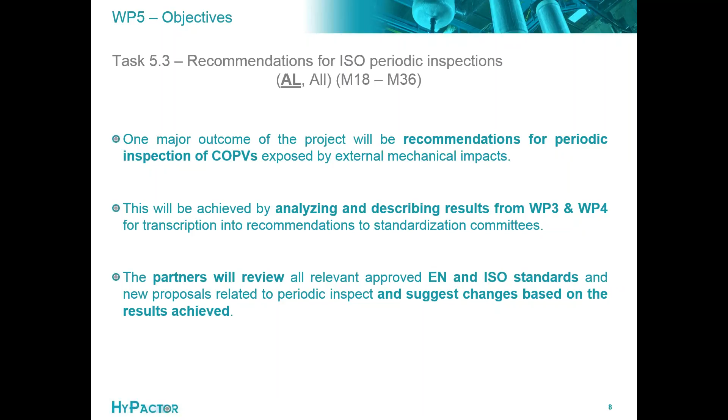As an example, you probably know the currently used periodic inspections. For metal pressure vessels, you normally do the hydrostatic proof test plus external and internal inspections. For CPVs, there's for example an ISO standard.

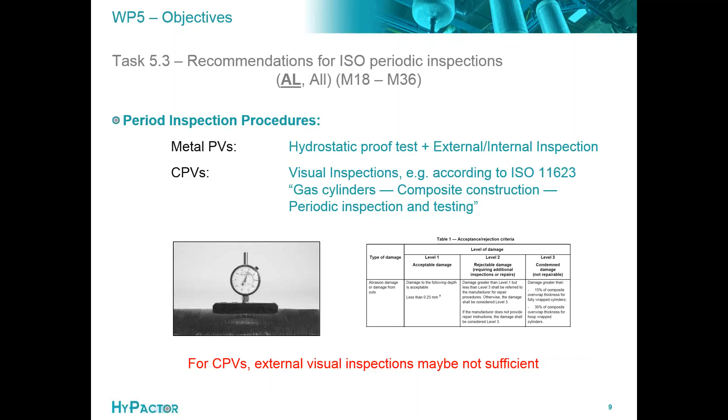ISO 11623 describes the periodic inspection and testing of composite pressure vessels, where you have different acceptance criteria and damage levels, defined mostly by external measurements of the depth of damage, abrasion, or whatever kind of external influence the cylinder has seen. For CPVs, we have seen that external visual inspection may not be sufficient, because you may have damages inside the composite that you don't see with superficial inspections.

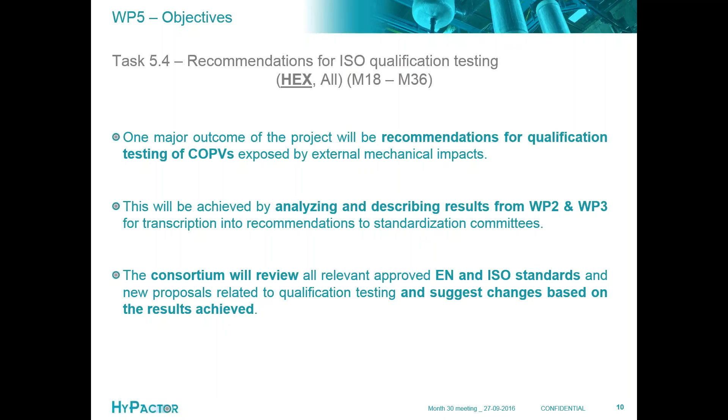Similar topic is the qualification testing. Also here we are doing a lot of different test methods, a lot of different energy levels. These are described as mentioned before by my colleagues in Work Package 2 and Work Package 3. And here we will also do our studies and discussions and see what we can propose as maybe improvements of existing ISO standards with regard to qualification testing.

So I think in a nutshell we also have some interesting results coming out of the impact testing we are doing. So there might be a way to have alternative impact test modes and energy levels that we can recommend coming out of this project.

Last but not least, there is a working group 24 within the ISO TC58 subcommittee 3, which is dealing in general with a safe design of composite cylinders, and Hexagon as well as Air Liquide. Hexagon is the convener, or provides a convener for that working group, so we have very good inputs of the topics of ongoing and maybe also future work items that can be addressed in this working group. And furthermore, as mentioned before, Hexagon as well as Air Liquide are members of several other working groups within EN and ISO, so we can make sure that results coming out of this project will be exchanged with the experts of the EN ISO working groups.

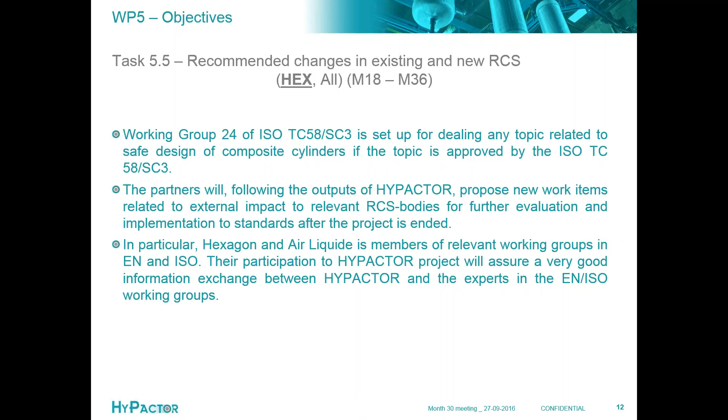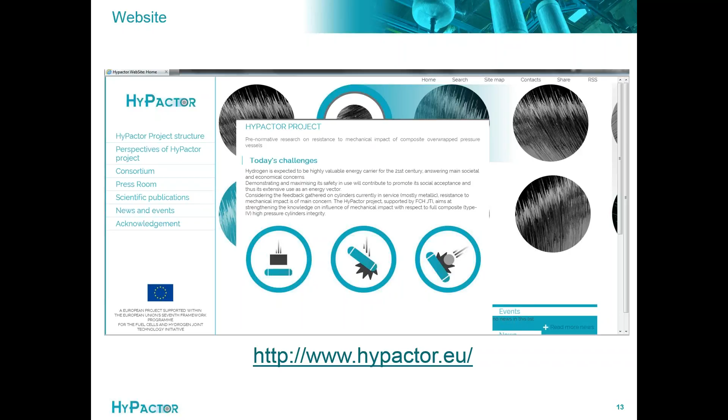As mentioned again before, the website where you can find all the information. I assume also this presentation or the video of this webinar will be posted on this webpage. So for everybody who wants to have a second view on the presentation or the film or the webinar, you are able to see this at a later point in time.